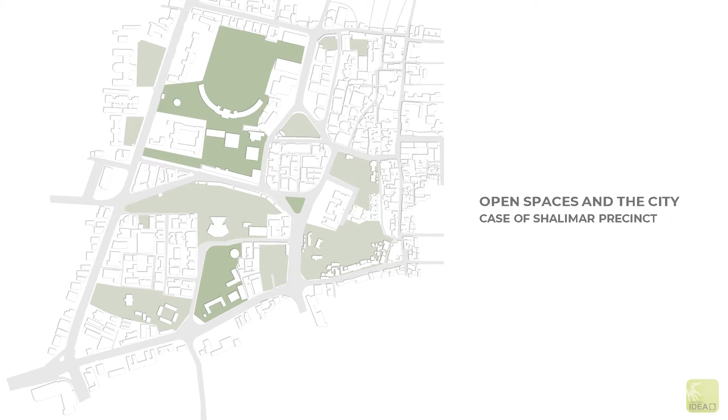Our topic for this studio is open space in the city of Nasik. This is a study into our understanding of open spaces in the city and how they can be utilized to create a better human environment. This study pertains to the case of Shalimar Precinct.

Open spaces are spaces which rupture the urban fabric of a city. These are spaces which are often neglected or forgotten. This is a result of improper planning of buildings without paying heed to context, creating multiple trapped spaces that cannot be used or have become a burden. Our approach is to identify and study these spaces in order to understand and attempt to revitalize them, making them a part of the city again, enabling us to improve coexistence of humans with the environment.

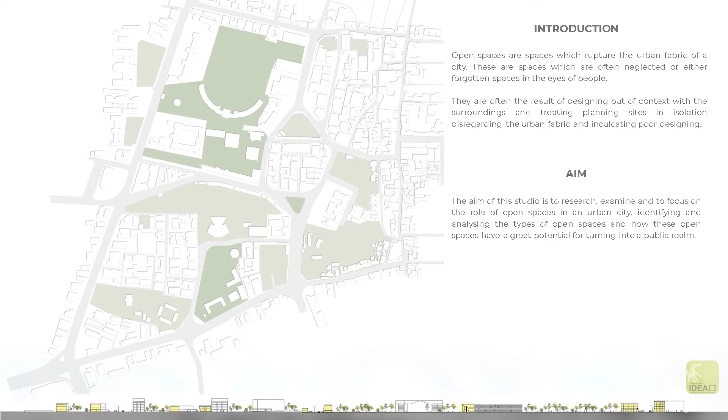The site is located in the heart of Nashik city. The area starts from Meher Signal to Sardar Vinsurkar Chowk across till the main road. The site is chosen because of its central location and the distinct characters of built forms in and around it. It serves as an amalgamation of the past and present evolution of Nasik. These areas have the heaviest footfall in the city owing to factors like the central bus stand, multiple hospitals, sports stadiums, public schools, district court, the collectorate, Zilla Parishad, and so on. It is also the main commercial hub of the city and was once the main transit route between Mumbai and Agra, Delhi. This region has undergone various changes throughout its hundreds of years of existence and has huge untapped potential to become the central open space for city level interaction.

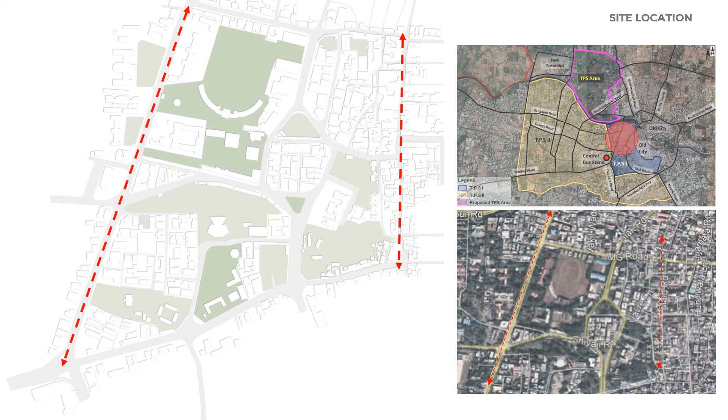The map denotes the extent of several green and open spaces in the selected site. Some of these green areas are trapped because of buildings or minimum accessibility or visibility. The possibility of aggregating these spaces in the core of the city provides us with a unique opportunity to serve the public realm. Of the total 73 acres on the site, only about 20% is covered in greenscapes. This study allows us to understand how different kinds of open spaces exist and how they can be treated to serve the public realm.

The spaces we've identified are the land in front of the court premises, the Shivaji Stadium, the land in front of the collectorate premises, Nehru Garden, Red Cross Signal, Main Road, open space within the regional super specialty hospital premises, the Shalimar Chowk, the Shivaji Garden, Ambedkar Chowk Cemetery, the Kalidas Kala Mandir parking, and the HRD Center.

Our objective with identification of these spaces was to understand how these spaces interact with the existing context and what potential lies in them. Studying these public spaces and their use would allow us to cater for social interaction among people.

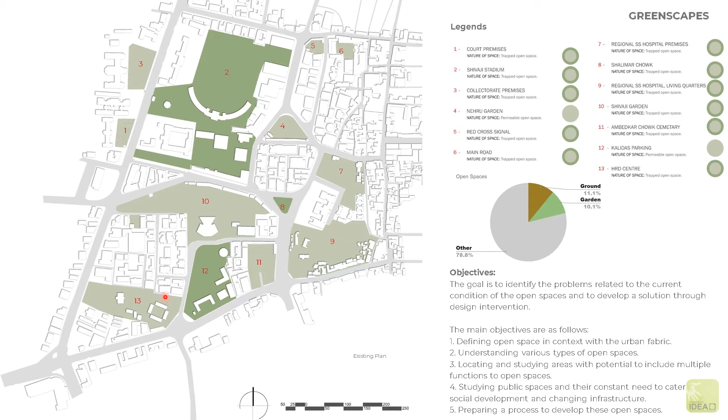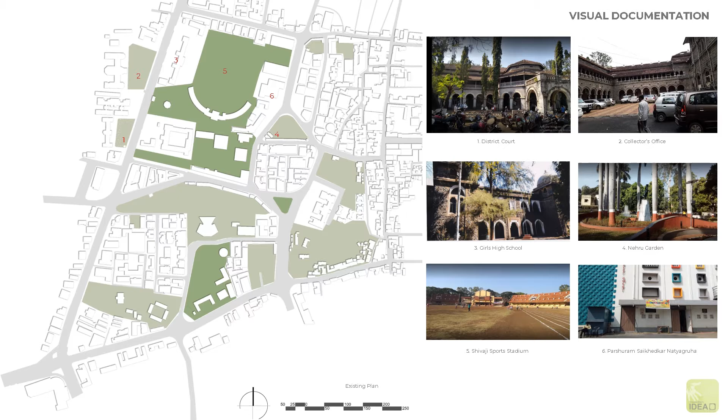The site is an amalgamation of various layers of activities, right from administrative buildings to sports stadiums and institutes. These buildings have great heritage value with regards to the history of the city. Right from the structures to the functional activities, one can observe cultural influence present in the site's context. The Zilla Parishad Road is host to multiple activities throughout its length, starting with the General Post Office, the Zilla Parishad itself, and cultural activities involving Kalidas Kala Mandir, Mahatma Phule Kala Dalan, and the Shivaji Garden. This particular area also has a greater concentration of hospital and residential clusters.

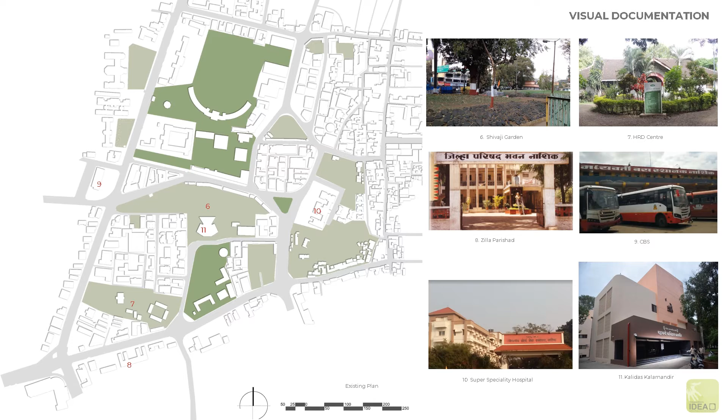The first major street of Nasik, Main Road, has now become a shopping area. The street is used by people from the city and surrounding villages too. The entire street has commercial on the ground floor and residentials above. Most of these buildings today have significant heritage value.

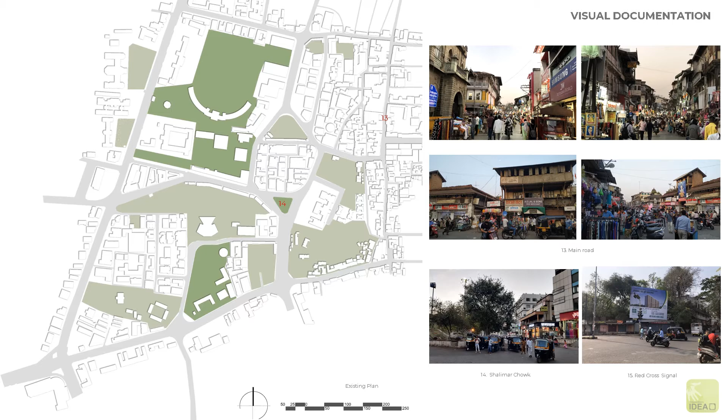The urban pattern of a city is made up of many different layers, and to understand the site, a thorough study has been done with the following attributes. Evolution of a city plays an important role in determining the factors that led to its growth. Tradition, art, culture, and modern industries have made a deep impact on Nasik.

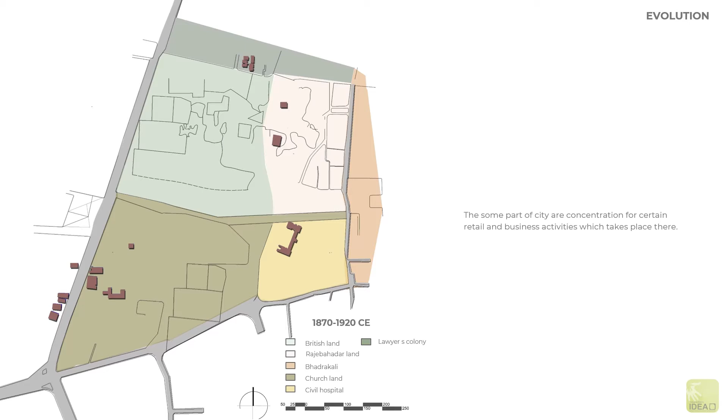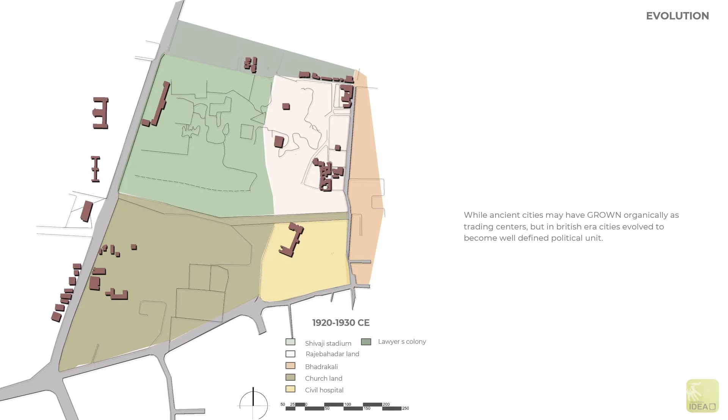During the era of Peshwas in 1751, the main bazaar road was the central core area. Post-Peshwa rule, the city came under British rule in 1818. Due to the prior existence and heavy usage of the Old Agra Highway, CBS bus stand came into the picture. The British shifted their administration core away from the central area, and hence the boundary of the city extended with the establishment of the district court and collector's office.

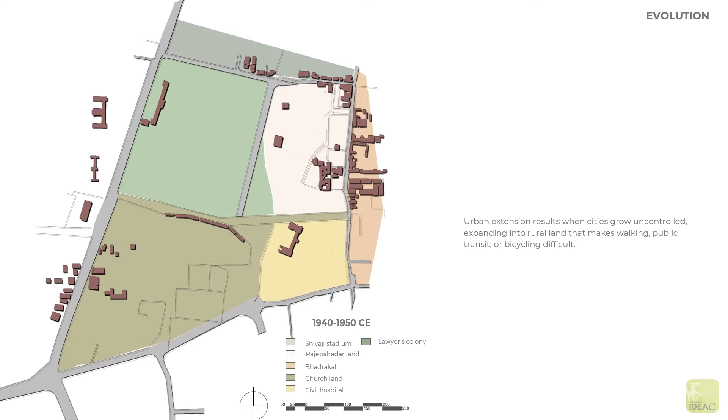Initially, the central major land parcel of the city was owned by Raja Bahadur. Later it was lent to the government and it got divided by the paving of Tilak Road and Shivaji Road to connect the old city with the central bus stand.

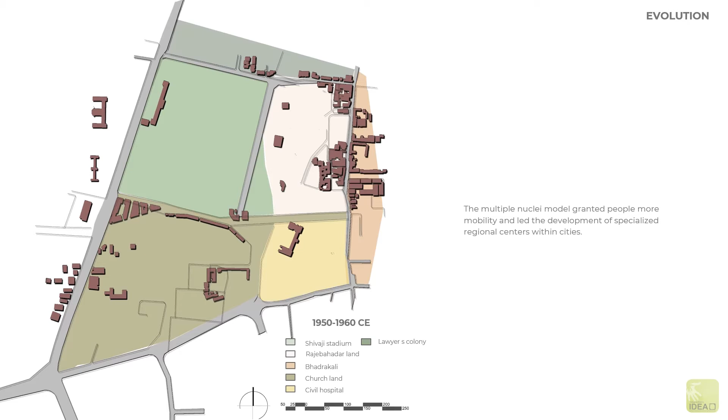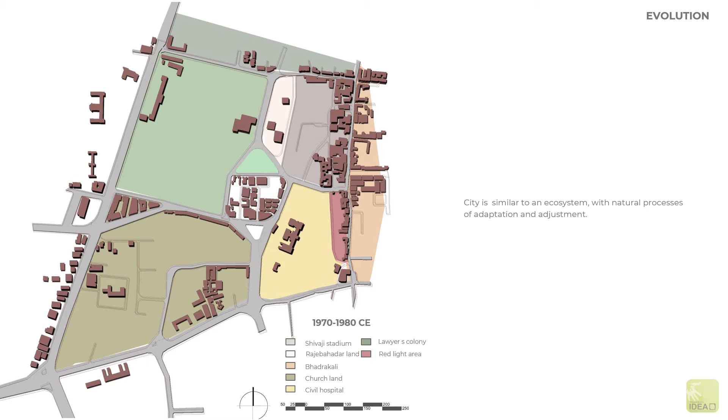Britishers established important structures like High School, Gymkhana, Home Guard Office, and the Golf Club, which showcased colonial architectural style. Owing to the district court, a lawyers' colony was formed on Mahatma Gandhi Road, which was later developed as a commercial complex in 1980. Nehru Garden and Shivaji Garden became the attraction point for the visitors.

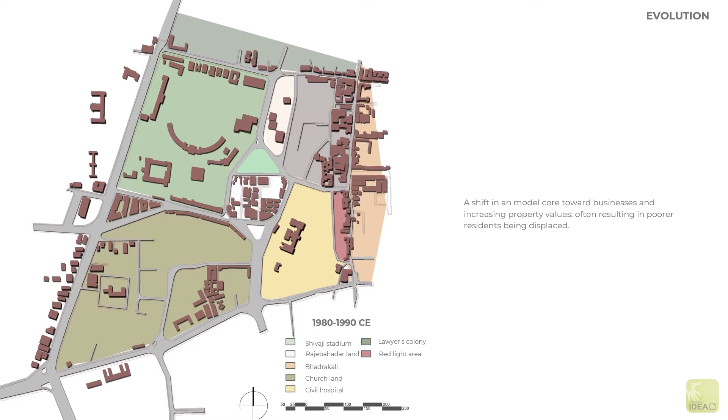In 1987, Kalidas Kala Mandir was built, which became the central recreation hub close to Zilla Parishad, CBS, and court buildings. With the establishment of prominent structures, residential and commercial activities started coming up in and around these hotspots. The growth of commercial establishments with time is observed in privately owned shops and municipal markets.

Sociocultural layer in community mapping helps us understand the evolution of a city. It explains the character and nature of their use in urban space. As people form communities, which leads to different socio-cultural aspects to form urban comfort. In case of existing scenario, formation of communities tells us about the change in character. The layers of urban fabric are religion, architecture, economics, and politics.

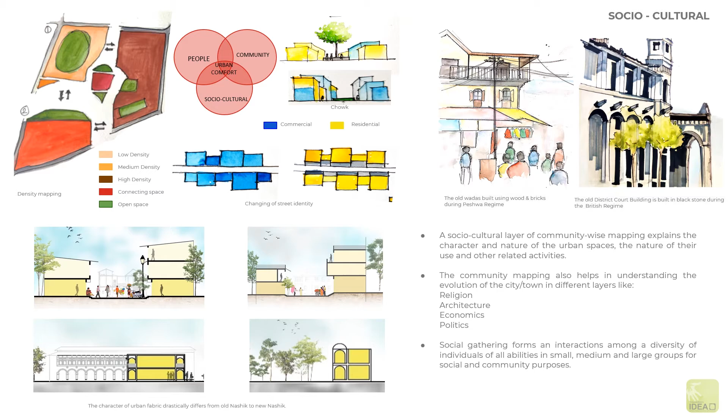To study all the layers, social gathering helps in interaction among diversity of individuals of all abilities in large, medium, and small groups for social and community purposes. Religious gatherings help us identify the significance of community cohesion around which many urban residents' lives revolve. Religious architecture in cultural heritage constitutes a unique role as it is visible for a long time, witnessing historic events. It forms communities and shows similar characteristics.

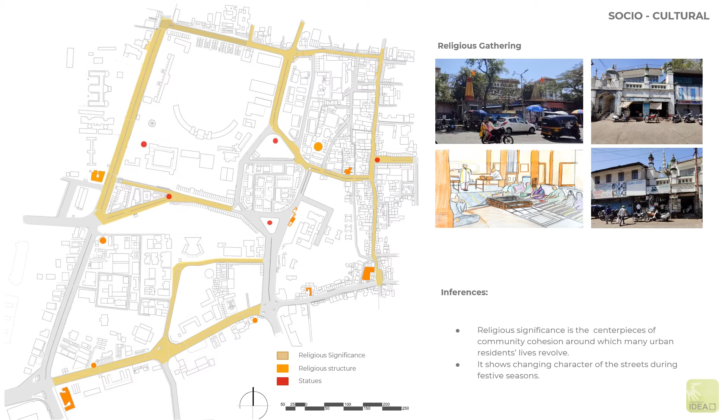Changing character of the streets during festive season is observed. This needs creation of a large gathering space in the city. Institution gathering mostly shows medium groups of interactions. It provides flexible gathering spaces. As these gathering spaces are interdependent, they boost the economic development of the city while acting as a landmark.

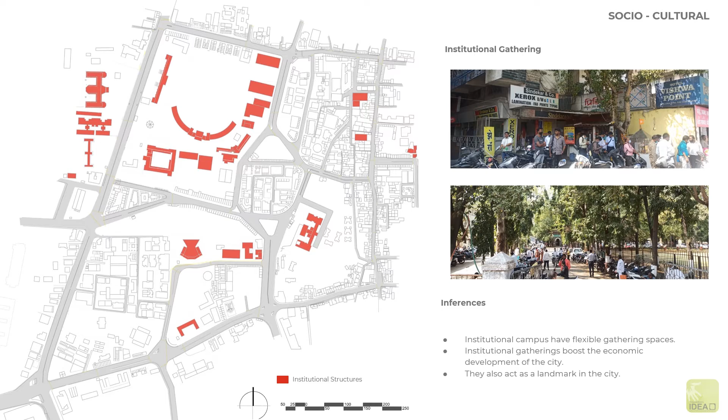Along with the emergence of the Mumbai-Agra highway, administrative buildings developed around the major roads, which gave the cities a district-level dominance. It boasted various primary and secondary recreational activities like transportation, hotels, and entertainment emerging along the edge.

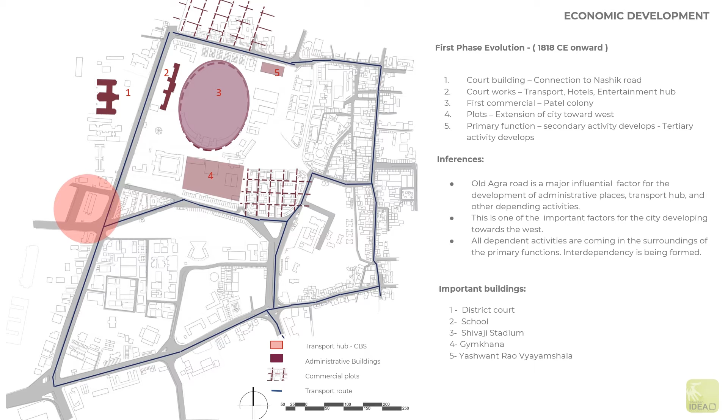Major traffic flow increased on connecting roads, which resulted in demand for land parcel of commercial activities. Increase in importance of land parcel resulted in increased land value. This gave rise to the growth of the city towards the west.

Extension of the city gave rise to various city-level activities which had started evolving around newly developed areas. Nashik Municipal Corporation was established along a major axis which connected CBS and Nashik Road. Nodes became an important street edge element and various activities started developing along the primary street. This gave rise to commercial development.

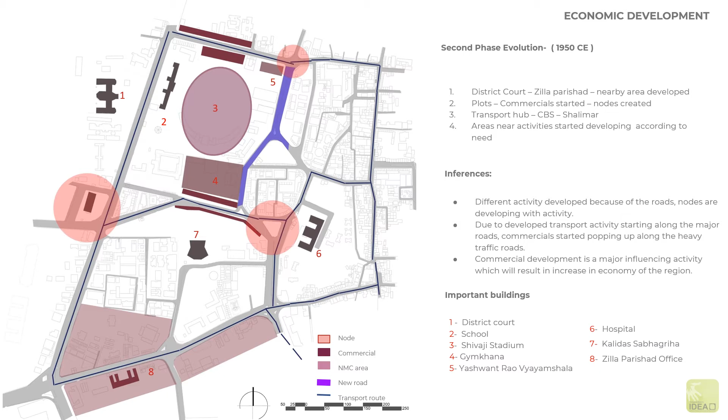On primary roads, commercial development started, which further influenced secondary and tertiary activities. This had a major impact on the development of the economy of the city. In the new development phase, there are a few occupational categories which connected the city with adjoining areas.

Administrative and industrial areas were connected at district level. This gave work opportunities for people. Migration rates shot up, and hence public facilities like transportation and parks started developing. Initially, farming was an important activity, hence settlement of farmers could be seen on the outskirts of the city. The interdependency of farming and commercials is seen, which later contributed to the economical growth.

Commercial and manufacturing aspects are the main influencing categories for economic development. Old core and the new development of the city showcase different functions. This cycle portrays how intercity linkages are formed due to commerce. Initially, manufacturing and selling of products both took place in the old core market. This is how different areas interlinked to the old core, which impacted the economic development.

The map displays the developed occupational categories along the side. Each category is developed in zones according to the functional interdependency, that is primary, secondary, and tertiary. From riverside to market spaces to private enterprises, there is a shift of commercial activities from old core to the new city. Spread of the city towards the west was due to constant flooding of the river.

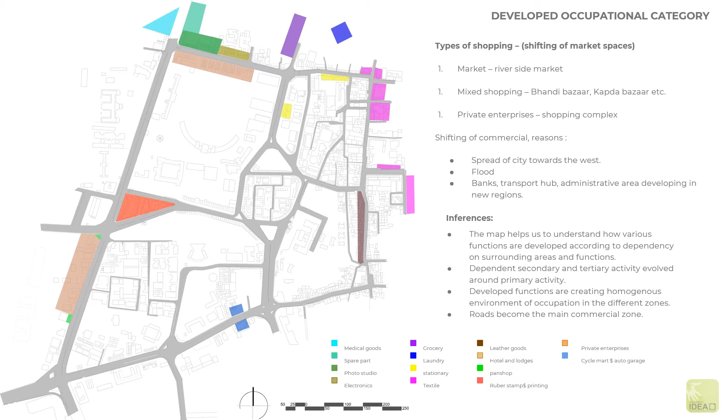New developed roads hosted main commercial zones at the edges, which helped in boosting the economy. In the evolution of industrial zone, technological development gave rise to industrial districts within the city, leading to decentralization of it. Climate, availability of water and power, land location and development — these are main reasons for starting new industries in the city.

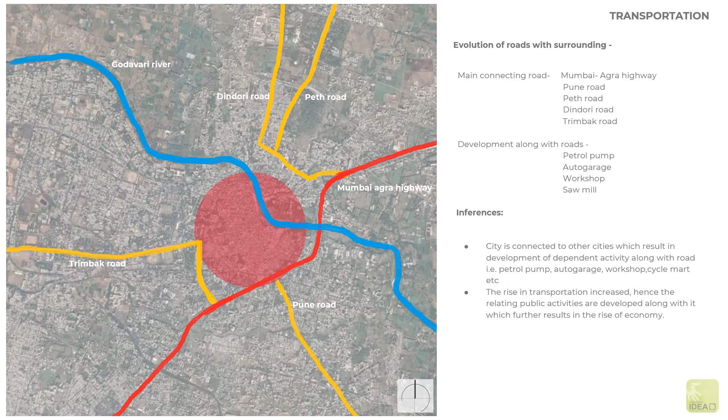Connection between cities resulted in development of dependent activities along the road, that is petrol pump, auto garage, workshop and cycle mart. Primary transports started developing along the edges.

In Old Nashik, building determines the road, but in new development, road patterns determine the position of the building. The main road is the first highway, and later, Old Mumbai-Agra Road emerged, which became the major link between the old city and new city.

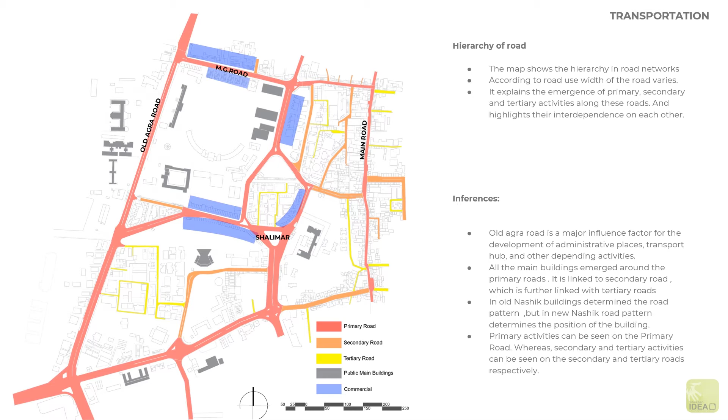Administrative buildings and commercial complex started coming up around the primary road. The emergence of the old Mumbai-Agra highway had a major impact on city development. Along with the road came a major transportation hub, that is CBS, with petrol pumps and auto garages.

Along the bus route, taxi and auto rickshaw stands emerged. This gave a boost to various secondary and tertiary activities.

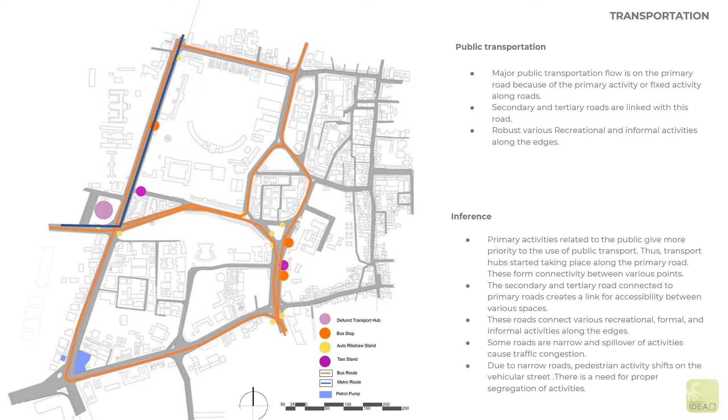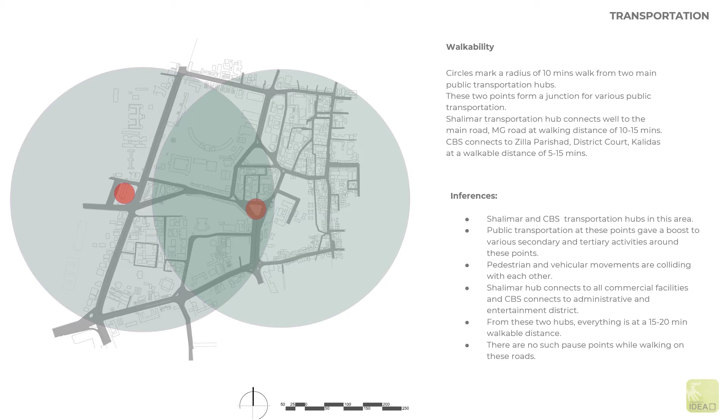Circle shows the walkable distance of 10 minutes marked from two major transport hubs, CBS and Shalimar. CBS connects to administrative buildings, schools, entertainment, and cultural district, whereas Shalimar connects schools, commercial zones, and the old core of the city. The emergence of roads and an increase in traffic flow gave rise to the formation of nodes

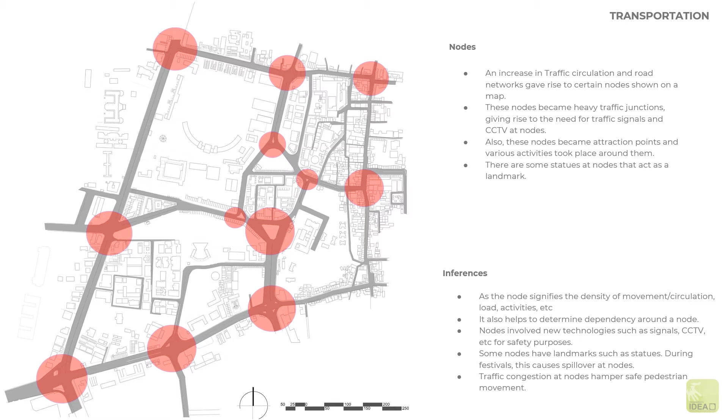and informal activities along the edges. Thus, the footfall increased. These nodes signify the density of movement and circulation load. Every node is different from each other in sense of network connection, the volume of traffic load, activities, etc.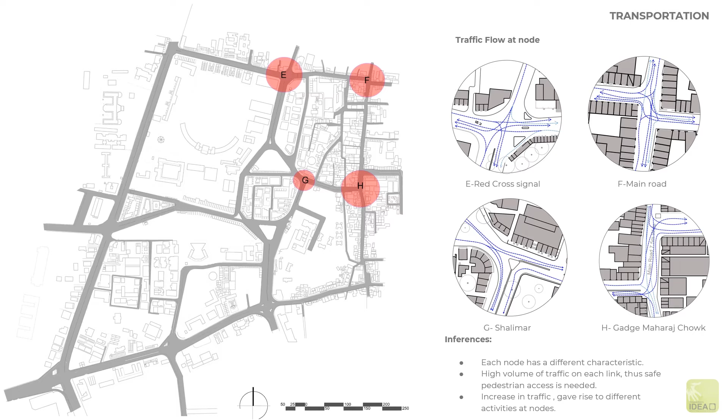Activities around nodes and traffic circulation collides with each other. Spillover of activities around nodes and road edges during festivals cause overcrowding which disturbs traffic flow.

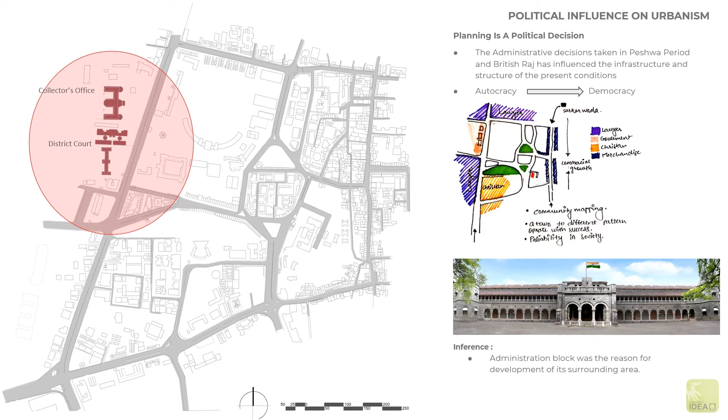In Old Nasik, Sarkarwada was the first administrative building in the Peshwa period. Later, a new administrative block was introduced by the British Raj, connected to the old Agra highway. Around this block, interdependent development started taking place like CBS, Lawyers' Chamber, print and rubber stamp shops, etc.

India got independence from British, but the influence of their architecture was still followed. Prior to the British period, the concept of shared walls was present in which ventilation was taken care of through courtyards. British introduced marginal spaces around the structures. The decision of giving foreground to structure is followed till now, which shows the importance of the building.

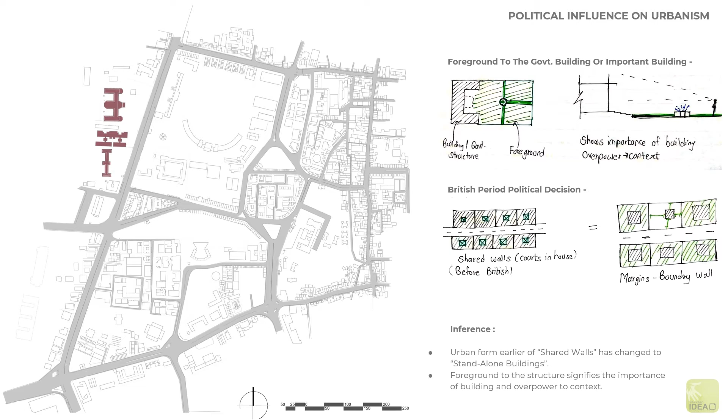Developing city raised the need for a new highway. So the new Mumbai-Agra highway was introduced outside the city. The whole land parcel was open and was under the ownership of Raje Bahadur. Commercial development occurred on plots around the roads to attract customers. Later, the whole chunk of land got converted into commercials, by which many secondary streets came into picture.

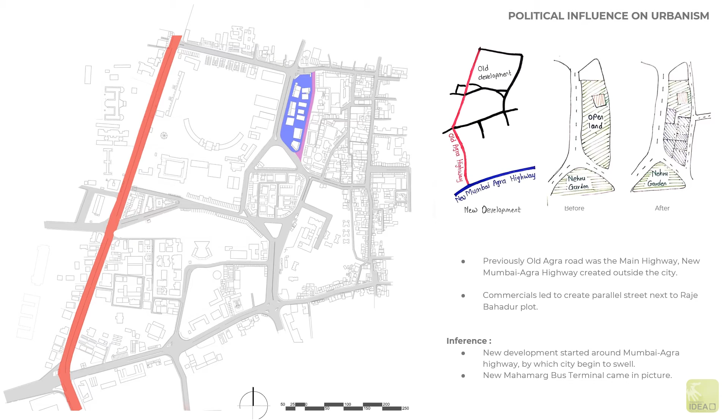As spoken earlier, Shivaji Ground was physically and visually open from the periphery, but political decisions were taken and it got trapped because of commercialization of the street edge. Similarly, the ground dedicated for B.D. Bhalekar School has been converted into pay and park.

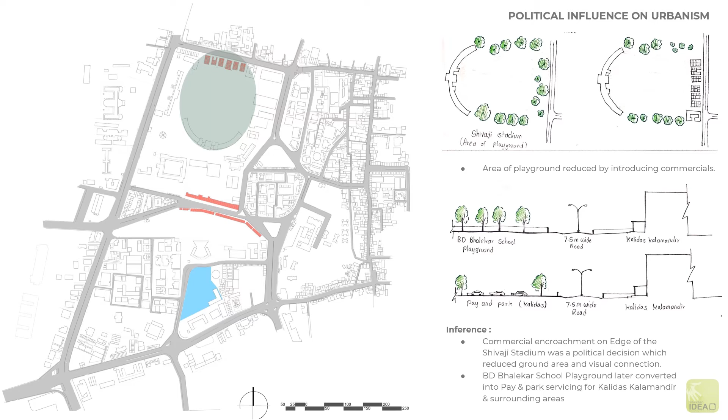Mapping of the site is essential to understand aspects like age of the building or the area which can be used as public realm.

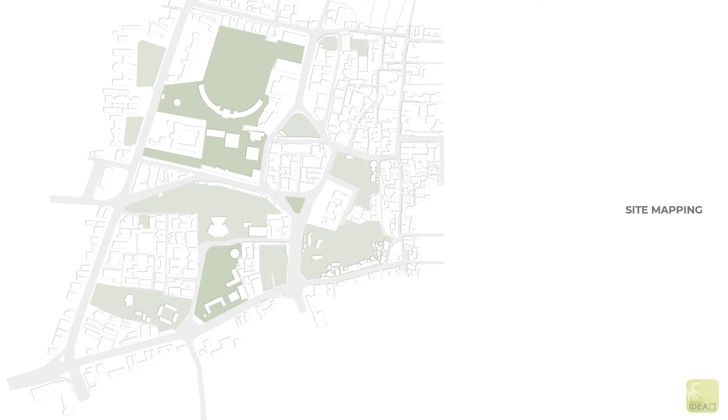The understanding of built versus unbuilt spaces helps us define the expanse of urban spaces, its scale, approach, and thus its usability. The figure ground study reveals the degree of contrast between the large and small building footprints. From this study, solids are represented by the built form, whereas voids are represented by unbuilt and open to the

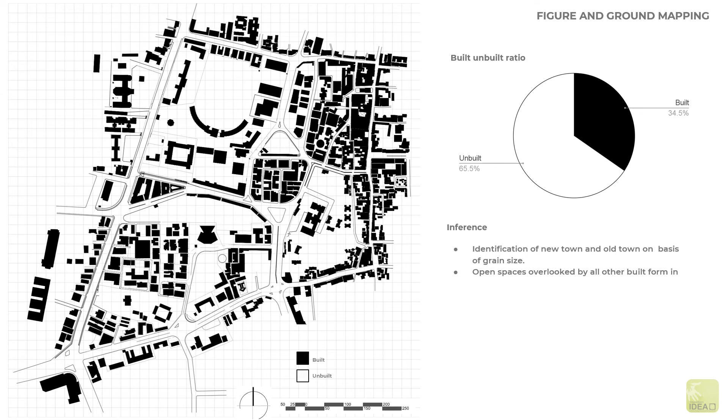public. This mapping is giving an identification of old and new city, where the old city structures share common walls and new developed structures share boundary walls.

Nolli plan is a figure and ground diagram which tells us about the connection between public and private space. Land coverage of building is visualized as solid mass and public spaces are represented as void. It also gives an idea of scale and footprint of buildings according to its usage.

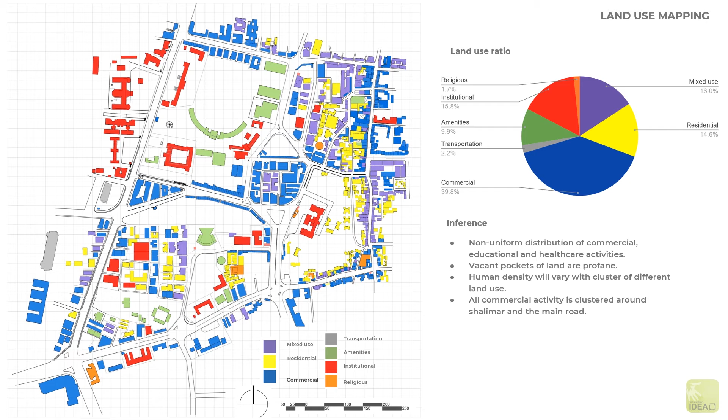Within a city, it requires proper zoning pattern in relation to the function desired within the vicinity. Land use mapping refers to the manner of utilization of land, including its allocation and development. The study of land use pattern will help in a balanced distribution of different land uses in the newer developments. It shows the non-uniform distribution of activities in the site.

The building age mapping allows us to assess the age of the building and identify whether within each precinct a building can be identified as heritage or not. It also helps in understanding the evolution of the sites and how activities on the site have influenced its growth.

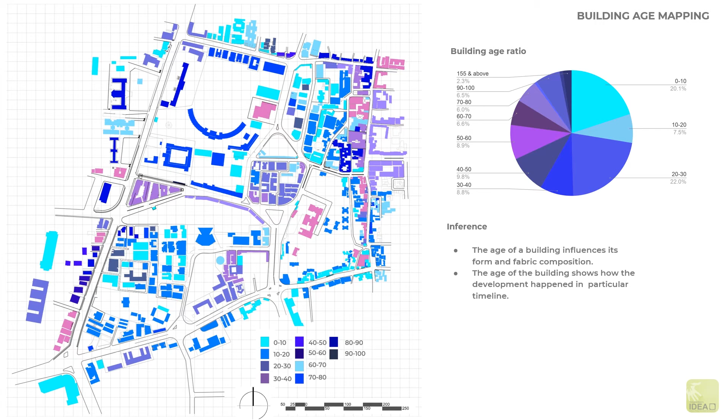Building condition mapping is necessary to identify scope for urban design interventions for betterment, especially for the old city. This also helps in introducing adaptive reuse strategies to the building.

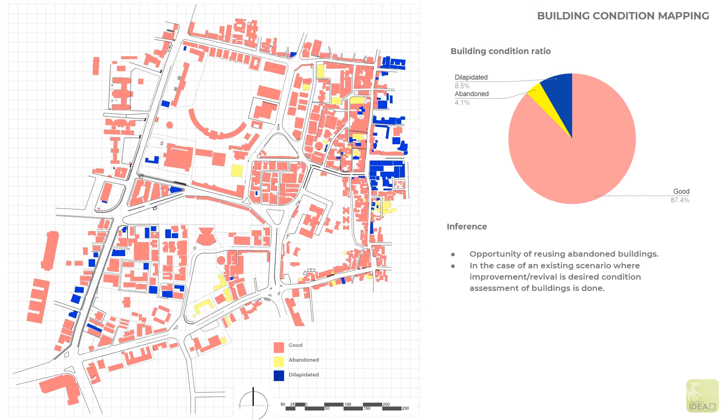In urban transformation projects, this is the best tool to document the built form, and in turn contributes to the character of the street, open space, or city.

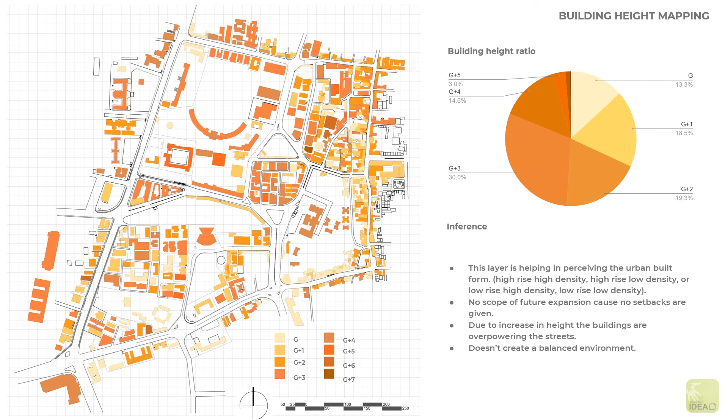Mapping of building heights gives an idea of the scale and volumetric perception of urban spaces and streets. The relation of building height to street width lends a character to the urban spaces, making them intimate or monumental.

After collecting all this data, it was essential to understand how to use it. So we studied eight authors who would help us achieve the same.

Our first author is Jan Gehl. Jan Gehl has an extraordinary vision where he talks about the city being given back to the people. He states that currently infrastructure is concentrated towards automobiles, which does not cater to a healthy city. His vision is to create a realm where pedestrians can walk safely.

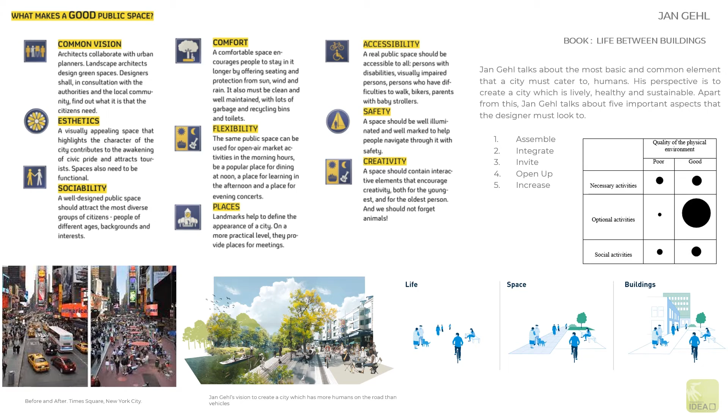In our site, we can observe spaces which denote Jan Gehl's perspective. In the new buildings, because of the increased number of floors, one cannot make contact with the ground easily, which hampers the mental and emotional connection of people in the community. These issues can be solved by creating a common space for everyone to enjoy.

Our second author is Kevin Lynch. Lynch's famous work, The Image of the City, is the result of a five-year study on how observers take information of the city. The aim of this theory is to understand the relation between city image and the observer.

The understanding is that the city must be held legible through sensory cues, and its image has to be perceived by the observer. Legibility and imageability would then lead to the identification of a structure and therefore a precise identity, due to which it will be possible to analyze a city and its own elements.

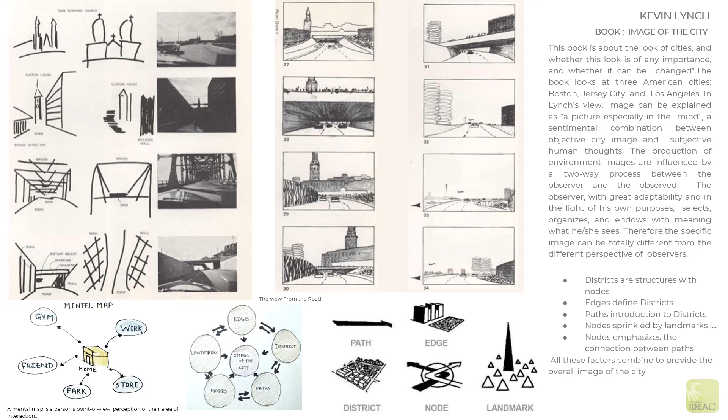Every observer perceives an image of the city which they remember. For that, it is important that the city is legible and has imageability. For imageability, the user understands their surroundings in a consistent and predictable way, forming a mental image of it.

This mental image is formed with five key elements: path, to provide a channel to travel; district, for identifying character; edges, to break boundaries and linear continuity; landmark, to provide orientation and a memorable location; and nodes, a strategic spot for intensive focus to and from.

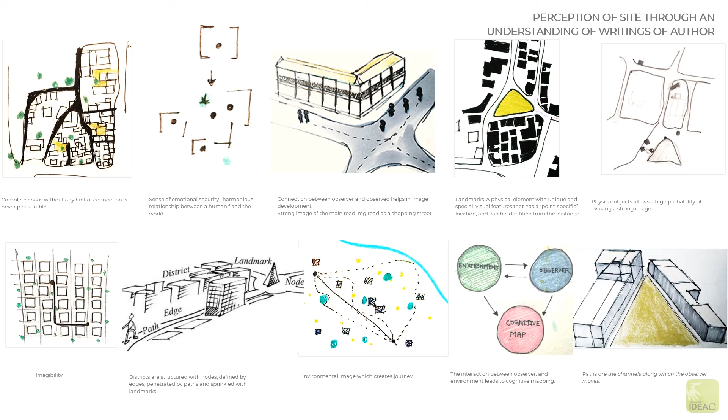Our third author is Colin Rowe. Colin Rowe, in his book Collage City, tried to reflect on the ongoing discussion by analyzing two radically opposite models for urban utopias that existed at that time.

The book gives a critical reappraisal of contemporary theories of urban planning and design and of the role of the architect-planner in an urban context. The author, rejecting the grand utopian visions of planning and design, proposes instead a collage city which can accommodate a whole range of utopias in miniature.

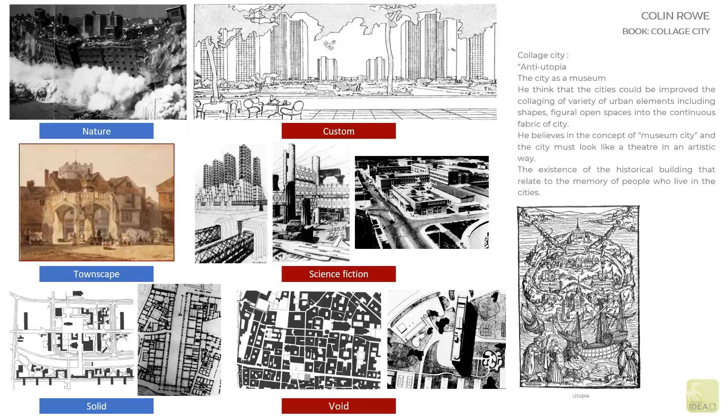The author talks about multiple ideas of amalgamation of distinct spaces and entities that end up syncing well with each other, creating a homogeneity of spaces from heterogeneity. This includes the idea of a museum city, where things have lost relevance, and it's necessary to make spaces that remain memorable to the user.

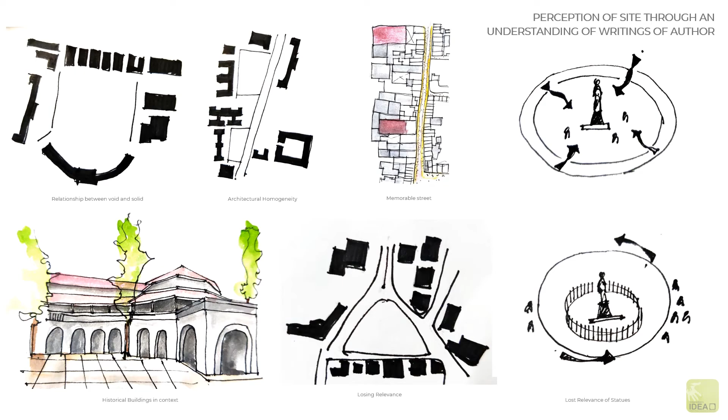Our fourth author is Gordon Cullen. According to Gordon Cullen, townscape is a visual art contained in the arrangement of buildings, roads, trees, nature, and the urban environment that decorate the space.

The townscape is one way that can be used in terms of physical visual recognition of the physical form of a city. According to the author, value should be added in the urban design of the city so that people can emotionally enjoy a good urban environment through psychological and physical sense.

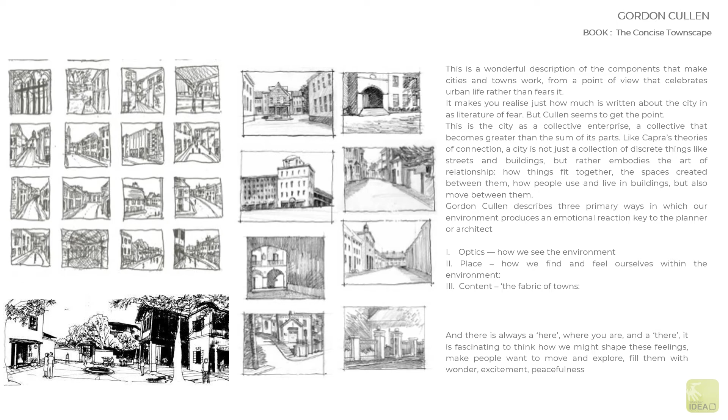According to the author, serial vision can be explained as the visual images captured by an observer while walking from one place to another. A human eye captures the image and breaks it into pieces, which gradually forms an integral image recording area for them.

Typically, there will be similarities or markers among the pieces that give certainty to the observer that he was still in the same region. Content depends on two factors, namely the level of conformity and the level of creativity.

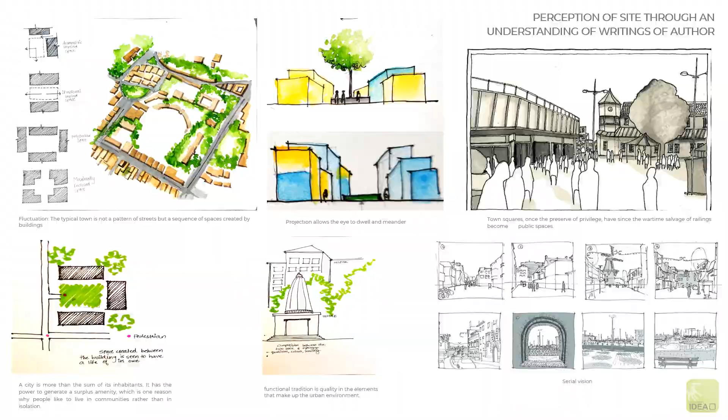Our fifth author is Aldo Rossi. The book, The Architecture of the City, gives a glance of architecture with respect to the city as a meaning of collective life, history, and reality, instead of a functional aspect.

Rossi's urban theories explain the evolution of the city, city as an artifact, primary elements as fixed activities, type over form and function, collective memory, emphasis on the collective, the public realm, continuity and permanence, concept of space, and the analogous city.

Sketches explain the evolution of the city from the old core towards the west. Urban morphology includes all of those areas of the main road that have physical and social homogeneity. The city possesses a center which is more or less complex and thus has different characteristics.

Tertiary activities are concentrated in this center. Historical elements around the main road and district court can be seen as masterpieces that sustain in form of space and are understood with time. District court, Kalidas, main road, CBS, schools, hospitals, etc. exist as fixed activities, which are primary elements in the city that have power to accelerate or retard urban process.

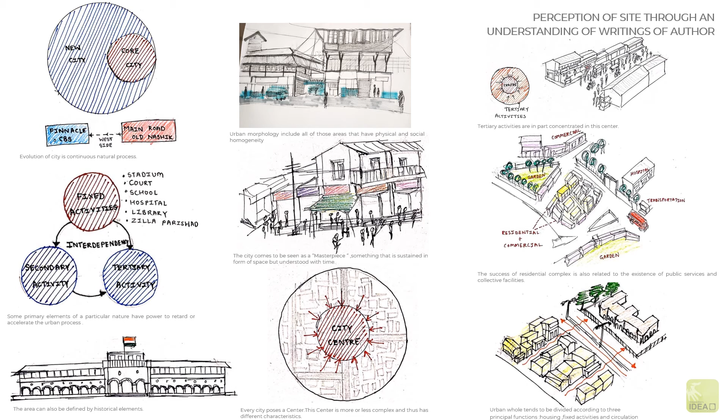Urban areas tend to be divided according to three principal functions: housing, fixed activities, and circulation.

Our sixth author is Edmund Bacon. In his book Design of Cities, Edmund Bacon talks about the interrelation of masses and space, and awareness of space as a conscious expression. He says a form is determined by the multiplicity of decisions made by the people who live in it.

Articulation of space is to produce a definite space experience in relation to previous and anticipated space experiences. Architectural form, textures, materials, modulation of light and shade, and color all inject a quality or spirit that articulates space. He quotes, the more density, the more walkability, more energy, more opportunities, more jobs.

That's my starting point of a successful city.

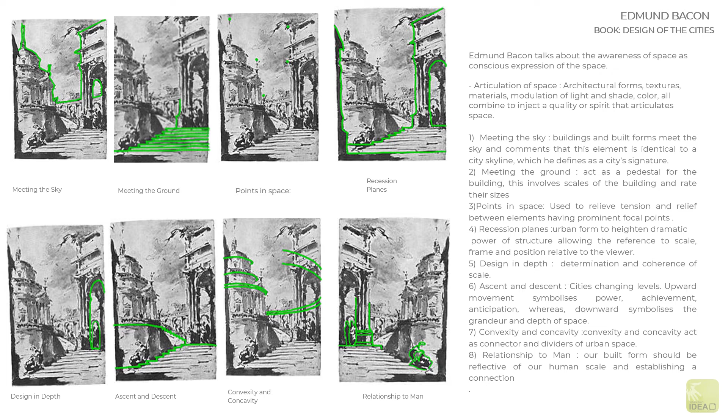Further looking towards the site, through understanding the writing of the author, he believed that sparse geometry of a building shows disregard for the vitality of the street, providing pedestrianism and moving sidewalks, giving the street a valuable public space.

The form of the spaces were determined by the people who live in it, with the context of the surrounding activities. Correlation happening from point A to point B.

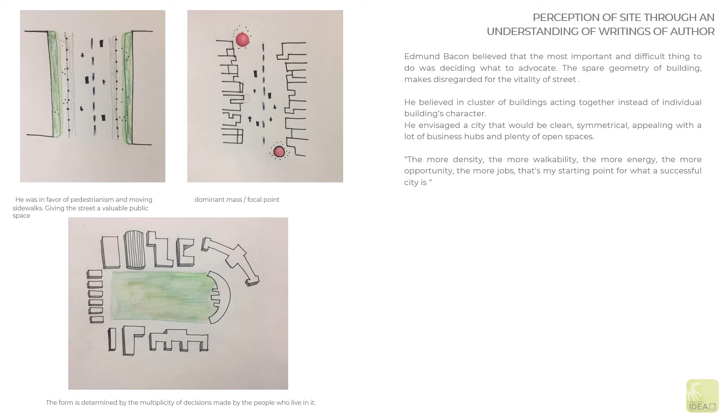Our seventh author is Rasem Badran. Narratives on People and Place. The book unravels various layers of history and memory and talks about the non-Western language based on relevant religious, social, and cultural precedents. Further, the author talks about how the present seems to become the past more quickly than ever before.

And increasingly irrelevant. The author strongly believes buildings in the past with complex spatial relationships are more compelling and memorable than modern buildings. He contradicts that the individual identity is no longer connected to tradition, social interaction, or a place.

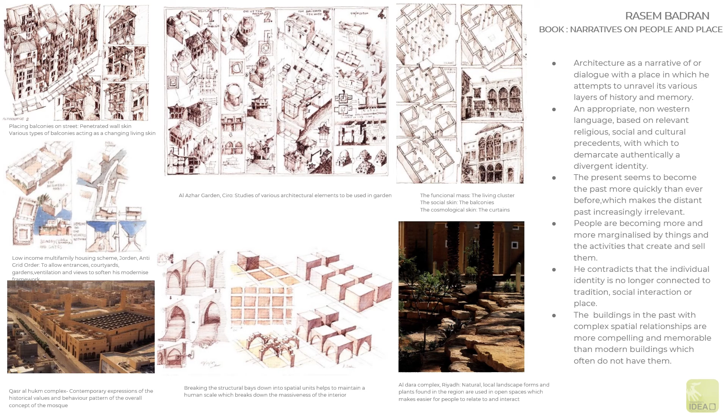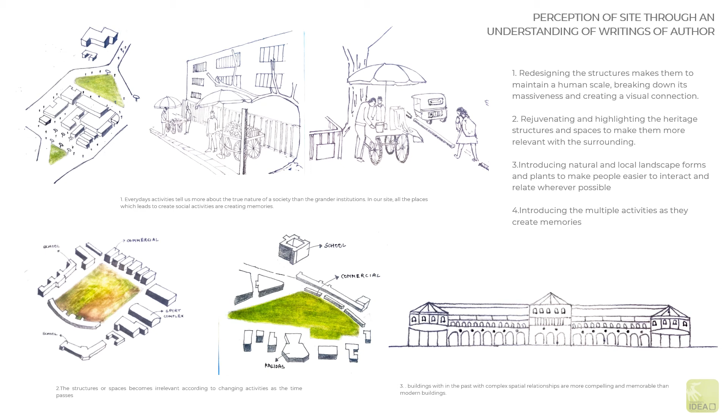Our eighth author is Rob Krier. The aim of his book, Urban Space, is to search how the traditional understanding of urban space has been lost within modern cities. By explaining the terms of urban space and its structure, he examines whether the concept of urban space retains some validity in contemporary town planning and on what grounds.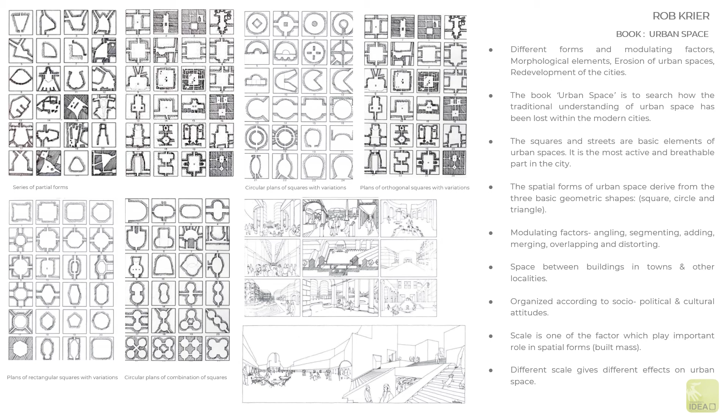The term urban space can be simply described as external space in a town. It is seen as open, unobstructed space for movement in the open air, with public, semi-public, and private zones. These spaces are the concept which is completely or partially surrounded by buildings.

A square is produced by the grouping of houses around an open space, and a street is a product of that spread of a settlement once houses have been built alongside the available space.

The more precise, three-dimensional quality of a building is expressed on each facade. The differentiation of scale plays an enormous role in all spatial forms, such as the effect of various architectural styles on an urban space.

To understand the site's strengths, weaknesses, opportunities, and threats, analysis has been done so as to identify the issues and to provide solutions for the same.

For the study, correlation and interdependency between all the primary, secondary, and tertiary activities has been studied, like hospital and fruit vendors, Nehru Garden and food stalls, Vakilwadi and Xerox shops, etc.

Strengths of the overall site are: the site is accessible and approachable from all directions. There is an availability of a lot of open space. Bustling commerce hubs at different locations like Shalimar, Main Road, Shivaji Road, etc.

generate high revenue for the entire city. The site is well connected to the entire city via buses, rickshaws, and taxis, as the main transportation hub is nearby.

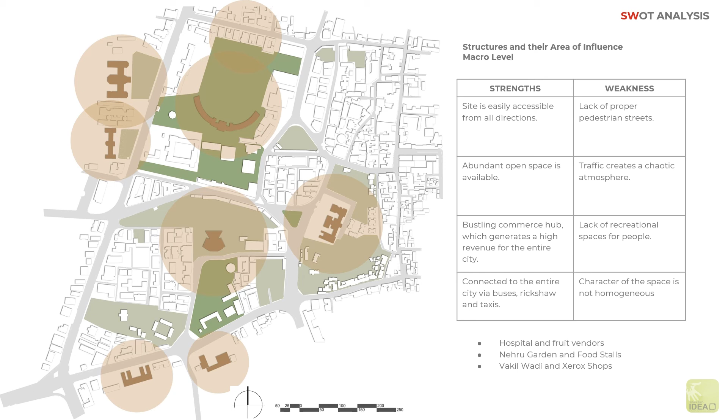There is a lack of homogeneity in the spaces. Opportunities of the overall site are: there are many identified open spaces which can be used for multifunctional activities. The open ground can be provided for all schools and colleges in the vicinity. It can provide a highlighted entrance to the open space which will give a visual access and spillover space.

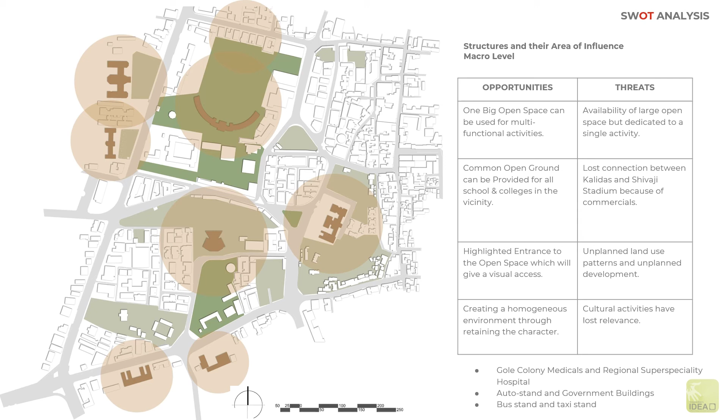Threats of the site are: there is an availability of large open space, but it is dedicated to a single activity, making it an exclusive space. It has lost all the connection between Kalidas and the Shivaji Stadium because of commercials. Cultural activities have lost relevance as the nature has been changed.

Talking about the schools and the Shivaji Stadium, the SWOT is as follows. Strengths are: all schools and sports related activities are in close vicinity. There is an availability of large open space. There is an important intra-city transportation hub, CBS, which is nearby.

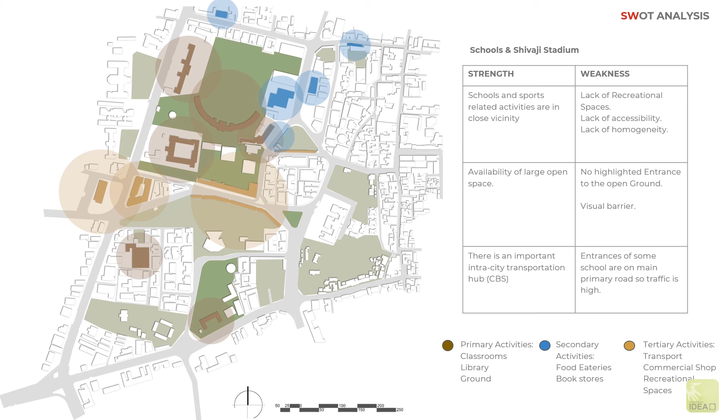Weaknesses are: instead of having need of recreational spaces for school, there is no recreational space at all. There is lack of accessibility to the sports complexes and the open grounds. There is a lack of homogeneity in the entire area. There are no highlighted entrances to the open ground as the importance of the ground is not known. As entrances of some schools are on the main primary road, there is no spillover space which creates a lot of traffic on the road.

Opportunities are: one big open space can be used for multifunctional activities. Common open ground can be provided for all schools and colleges in the vicinity, creating a homogeneous environment by retaining the character. Threats are: there is an availability of large open space, but it is dedicated to a single activity. Shivaji Stadium, Yashwantrao Vyayam Shala, Nashik Gymkhana all have an individual identity and are all exclusive spaces.

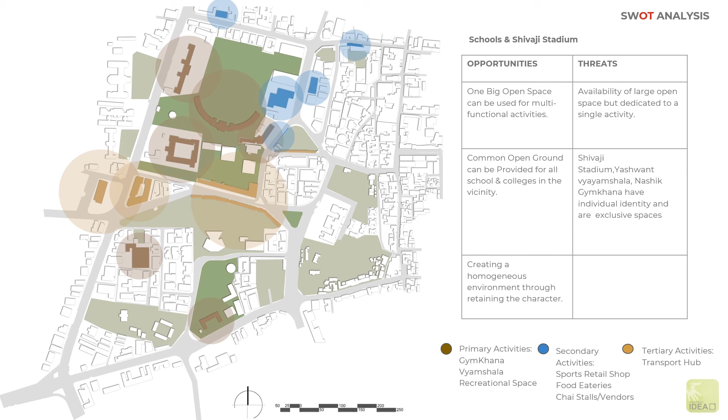Talking about the district court, entertainment amenities, and the public library, strengths are: court and related activities like lawyers' chambers, Xerox, and stationaries are in close vicinity. Library and bookstores share a close space with the court and the many schools. Intra-city transportation hub is close to all these spaces.

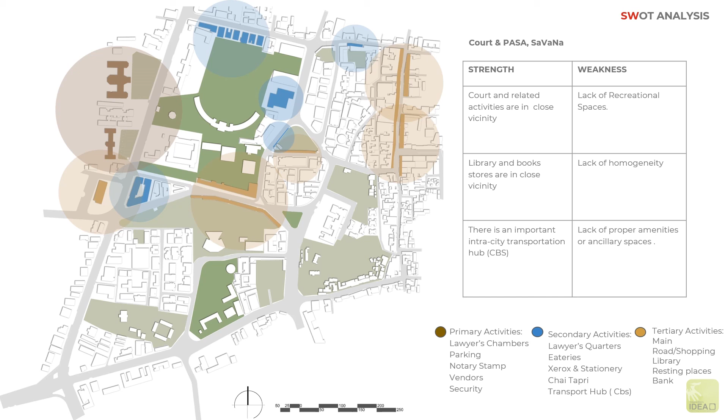Weaknesses are: a need for refreshing and recreational spaces in court premises is needed. A lack in structural homogeneity is clearly visible. A lack in ancillary spaces is observed. Whereas the opportunities are: the big open space can be used for multifunctional activities, creating a homogeneous environment through retaining the character of the buildings, clubbing court-related activities and library in one premise. Threats are: loss of footfall near the library, development of unused spaces in the open area, and creation of an uninviting space for the public realm.

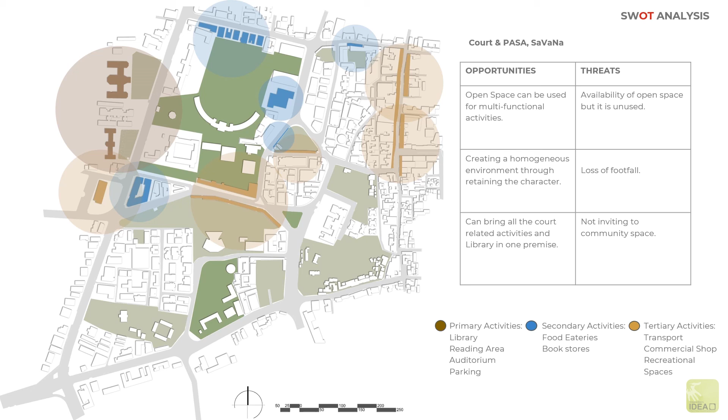The strengths for the hospitals are: the activities on the main road drive people to these institutional buildings. The street scale is humane. Some structures stand uniquely, making them easier to identify and mark as landmarks. Weaknesses are lack of open spaces, lack of social spaces for the residents living around the area, lack of gateway or area definition treatment. The opportunities are if open space is provided with primary activities, the secondary and tertiary could be indulged with the same.

Abandoned and dilapidated structures can be reused or converted to open spaces. The retainment of the character of structures is essential. Threats being the street width is not sufficient with respect to multiple activities in progression in the area. Vehicular movement is hampering the pedestrian movement on the main road, and lack of pedestrian involvement is observed.

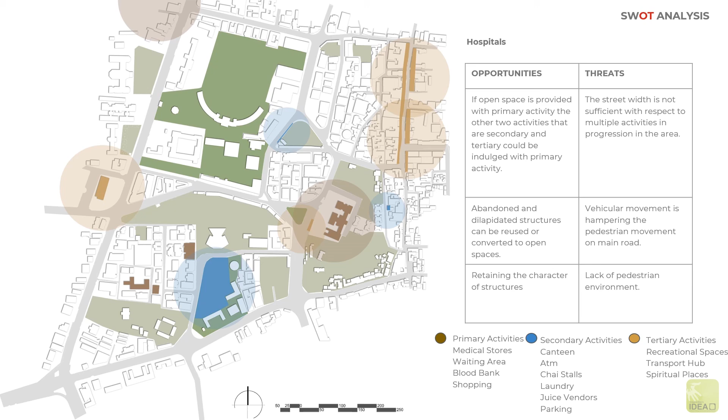The Zilla Parishad establishes a predefined cultural relevance and a green corridor which is available as the HRD center land. Availability of large open spaces are distinctive throughout the area. Weaknesses are there is no defined land use. Internal access roads create bottlenecks due to insufficient street width. Shivaji Park does not have a defined character.

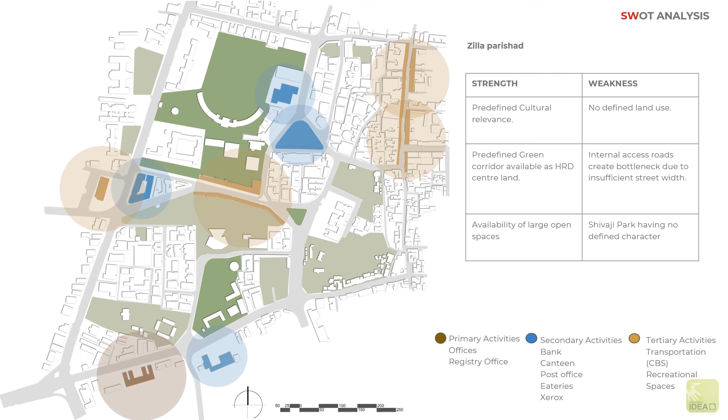Opportunities being land use can be redefined to accommodate, cultural relevance can be highlighted, sustainable open space can be developed. Threats are unplanned land use patterns and unplanned development, excessive surface parking, and clashing of vehicular and pedestrian movements.

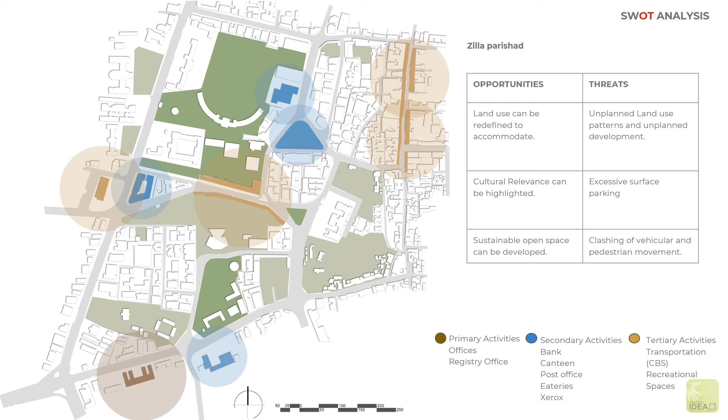As for the Kalidas Kalamandir, the nearby public transport is beneficial for use. It has a proper parking space and is accessible by the location. Weaknesses being no eateries can be seen except the canteen around the vicinity. Shivaji Park, which is beneficial for the Kalidas, is not in use because it is on the backside of Kalidas, due to which we can see a reduced footfall.

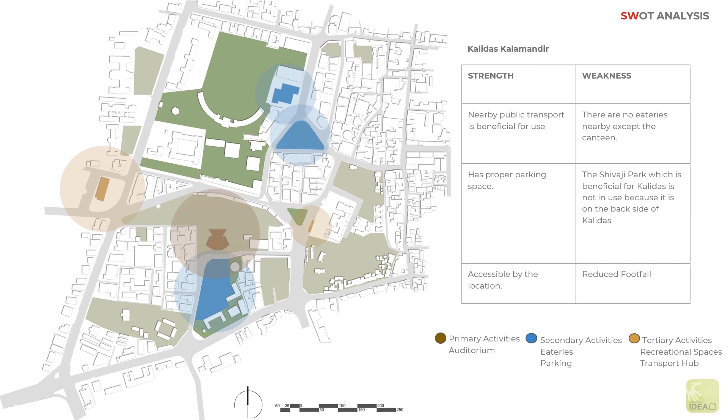The opportunities being it can have multiple eateries, a proper use for the Shivaji Park, and it can also be converted into a public exhibition area. The threats being it lacks a lot of multi-use spaces, cultural activities which happen in the Kalidas Kalamandir have lost relevance, and it is visible only from the front side.